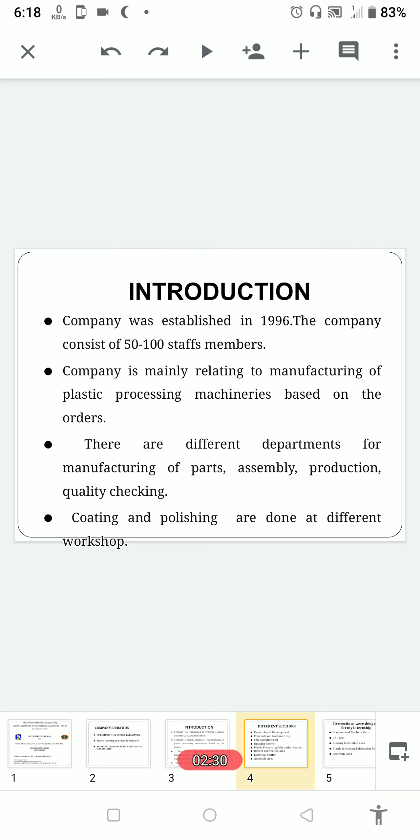For example, the luggage lift has one different section, and there are cutting sections, plastic processing machine fabrication unit, and conveyors. For major parts there were subsections such as the blower section, gearbox section, screw making shop, and panel section, etc. They also had an electrical section, machine parts storerooms, raw material storerooms on the first floor, and dressing rooms, washrooms, etc.

Five sections were designed for our internship workshop: conventional machine shop, CNC cell, blowing fabrication area, plastic processing fabrication section, and assembly area. They did not allow us to work there because accuracy and precision were required. Instead, they allowed us to work on small machinery processes like grinding, drilling, welding, and small work where accuracy does not matter.

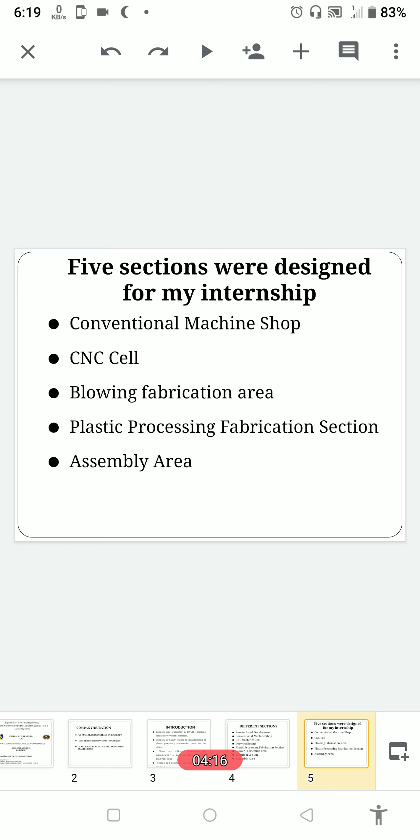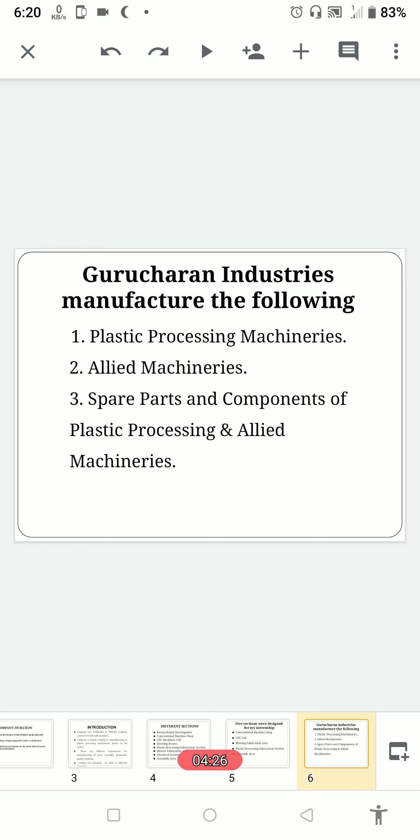Gurucharan Industries manufactures the following: plastic processing machineries, allied machineries, spare parts, and components of plastic processing and allied machineries.

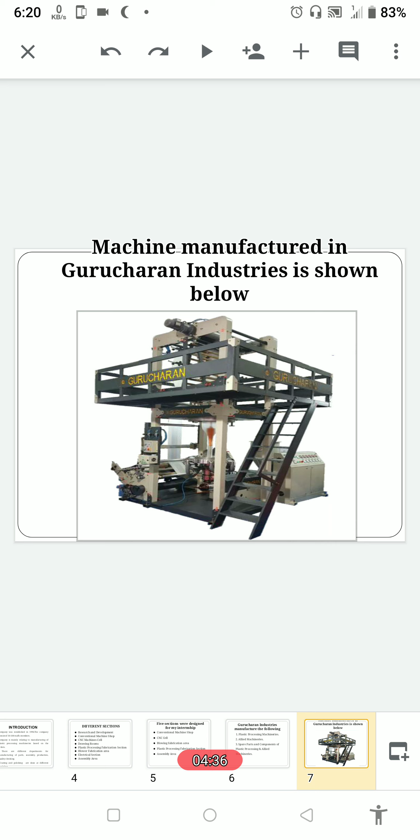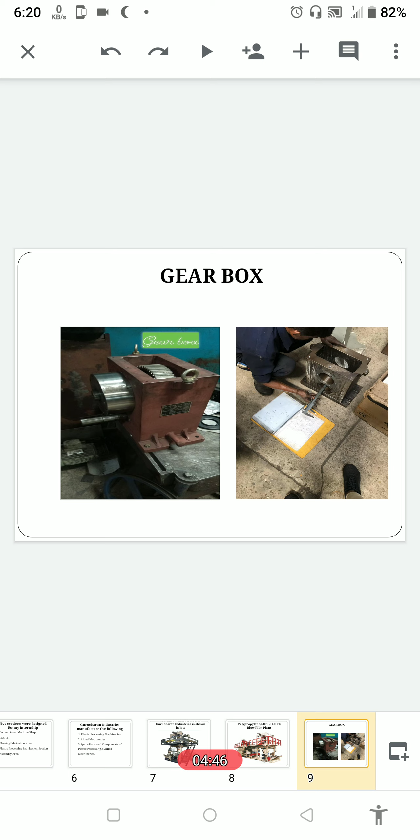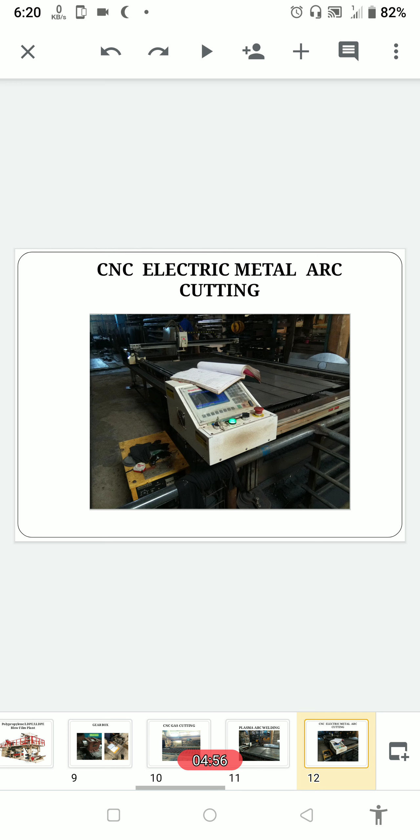Some of the machines are shown here: polypropylene and low density polyethylene blow film plant, and gearbox, whose photo we have taken. CNC gas cutting comes under the cutting section. Also shown: plasma arc welding, CNC electric metal arc cutting, and extruder.

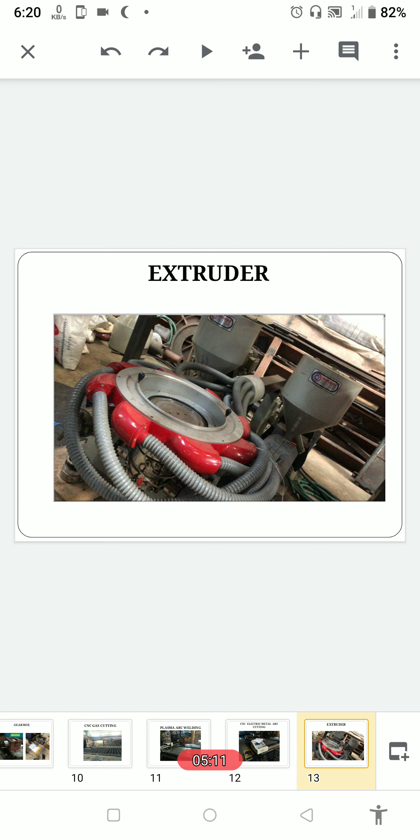Here, the plastic, when put into the blower, goes into the extruder and heats up. After melting, it comes through the die of the extruder, and then there is assembly of the shaft with the gearbox. This is one section there, where they bring the gearbox and shaft, connect them, and do the assembly.

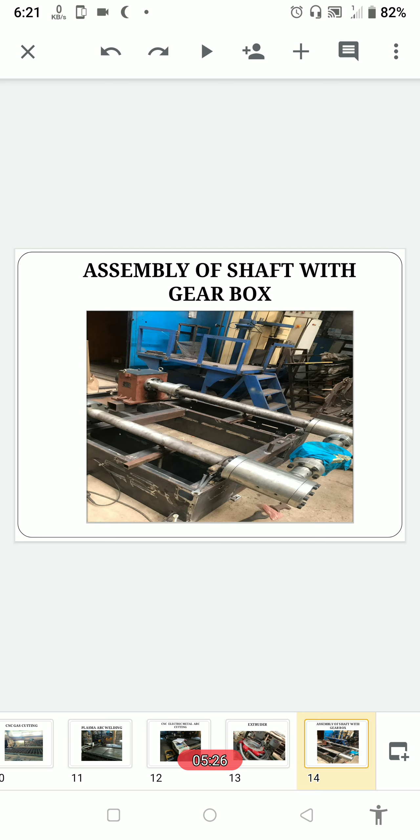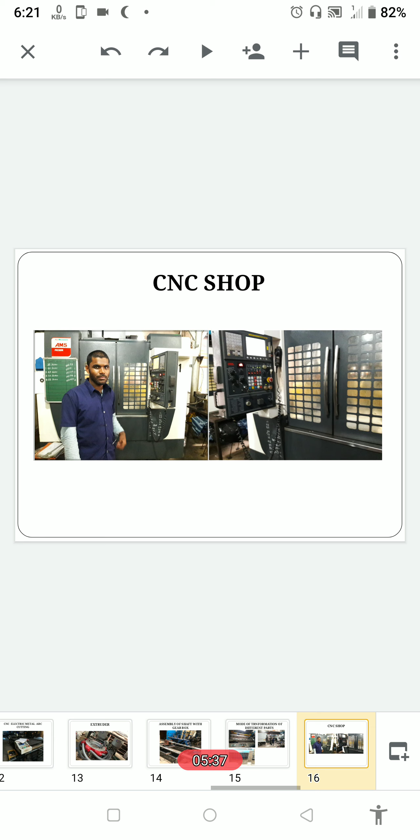Mode of transportation: they have a luggage lift and conveyors. Also shown is the CNC shop with some machined parts, and their achievements.

Some of their achievements include the Export Award in 2004 for special recognition under the SME category for plastic processing machineries and spare parts, given by the Kanara Chamber of Commerce and Industry, Mangalore, India.

Then, internship outcomes: what we have done in the internship. We learned some machining processes, and we did grinding, drilling, and welding. In the assembly part, we learned how to assemble and how to pack in the packing section, and we also did transfer, loading, and unloading.

We have also worked and seen how it works in industry, how the scenario is, and how teamwork works, for example in the fabrication section itself there are 5 to 6 members, and how they do fabrication, each member holding a job, and how they work to complete their work in a specified time.

And the discipline they are following there was very good. Each member was doing their job for a specified task there itself, and they are not roaming here and there. It was a very clear cut idea. They are working under their manager.

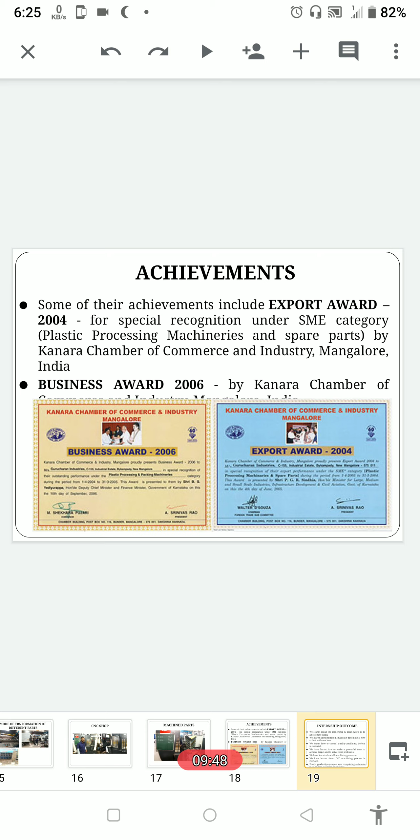Then there are mainly 8 departments. He said, research and development.

There is a research and development drawing room, there was one room there, and they have one model. Initially they make some minor changes in their model, and as per the requirement of the customers, their R&D is not much more extensive. There is just a little bit of change in their model as per the customer requirement.

Then the conventional machine shop, there were many lathe machines, for example almost 30 lathe machines, for the machining of parts required for the plastic processing machineries.

Their manufacturing unit is a self-reliant facility with extensive in-house infrastructure. Their products are the result of an elaborate process of creating end products of extraordinary finish and performance.

Then drawing rooms, where designs are made for cutting works. Some of the designs for CNC machines and plasma cutting are done in those drawing rooms.